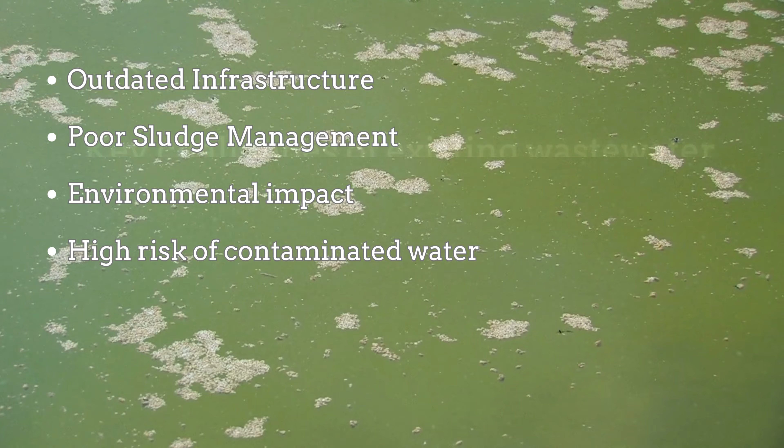The environmental impact is also significant, posing risks to local ecosystems and biodiversity. Most critically, the high risk of water contamination remains a serious concern, threatening both community well-being and water security.

In the heart of Malaysia's rural communities, water is life. It nourishes families, sustains agriculture, and supports livelihoods. But behind these necessities lies a growing crisis.

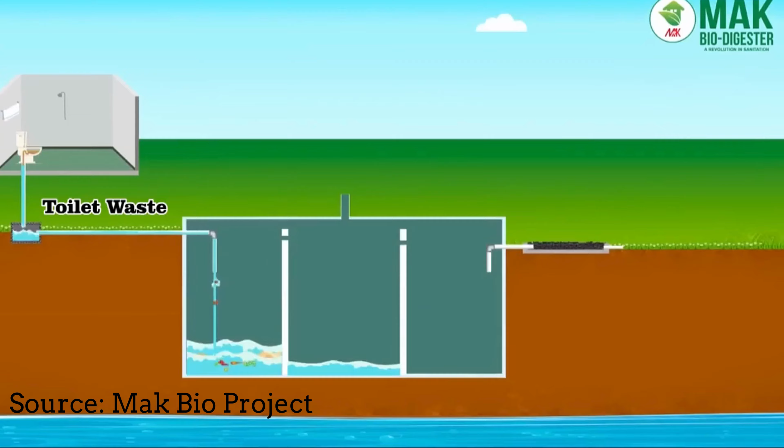Over 7.5 million people in rural Malaysia depend on local water sources. Yet, outdated wastewater treatment systems continue to contaminate these vital waterways.

For many communities, traditional septic tanks are the only solution. But Malaysia's diverse geography poses unique challenges, making this system ineffective.

In Dataran Pantai Timur, heavy monsoon rains lead to frequent flooding, causing septic tanks to overflow and contaminate water sources.

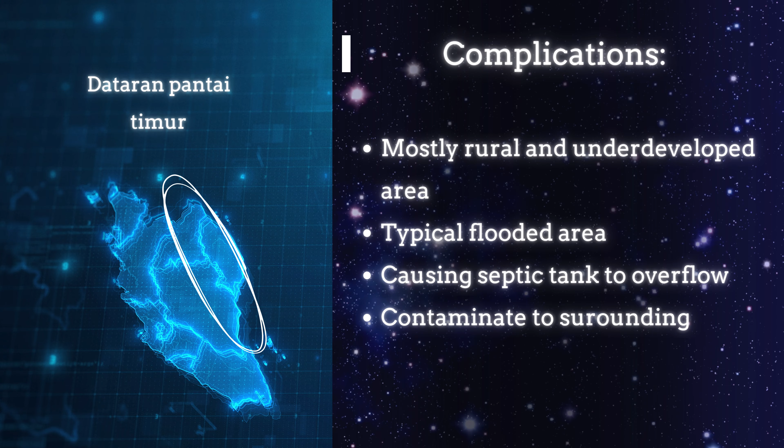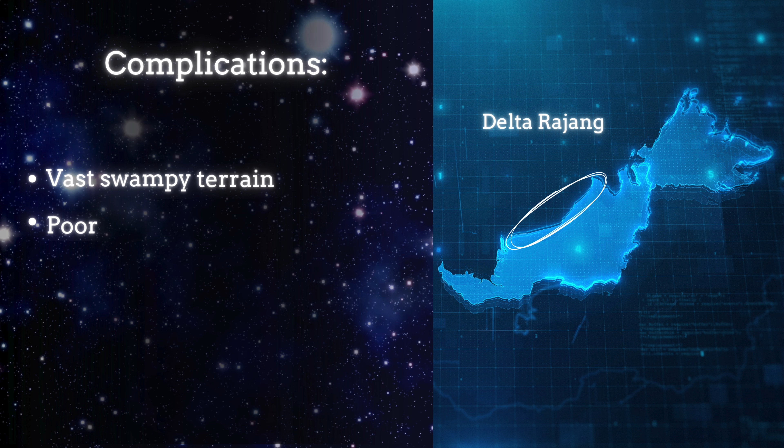In Dataran Johor, high groundwater level and peatlands make wastewater disposal difficult, leading to long-term environmental damage. Meanwhile, Delta Rajang, with its vast swampy terrain, struggles with poor soil drainage, making conventional septic systems ineffective.

To effectively treat wastewater in rural Malaysia, we have designed a multi-stage treatment system that ensures maximum efficiency while remaining cost-effective and sustainable. The process begins with screening, where large debris such as plastic, leaves, and solid waste are removed to prevent clogging in the later stages. For low-density rural areas, we use a manual bar screen, and a mechanical bar screen for high-density areas.

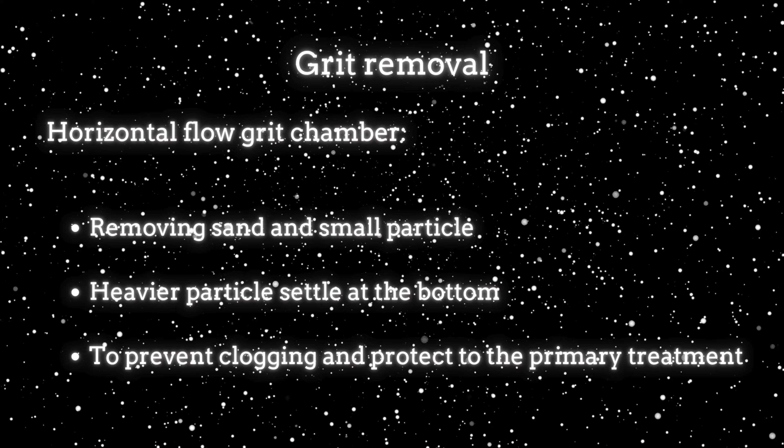After screening, the wastewater enters a horizontal grit chamber. This component is designed to remove heavy particles like sand and small stones that could cause damage to the system. This is to prevent blockage and mechanical wear in the downstream stages.

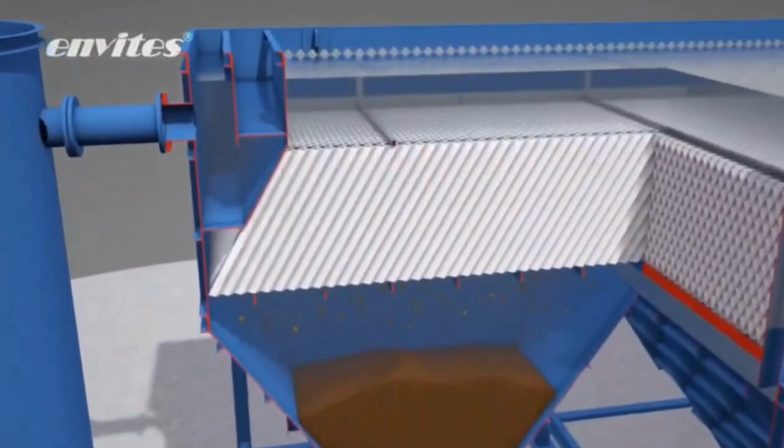Next, the wastewater moves into the lamella clarifier, a sedimentation system that increases the settling surface area without taking up too much space. The inclined plates allow suspended solids to settle faster, reducing sludge build-up and improving the efficiency of our treatment process.

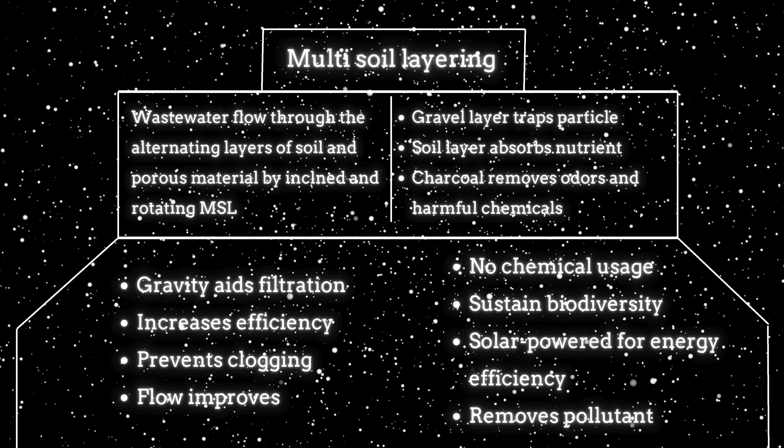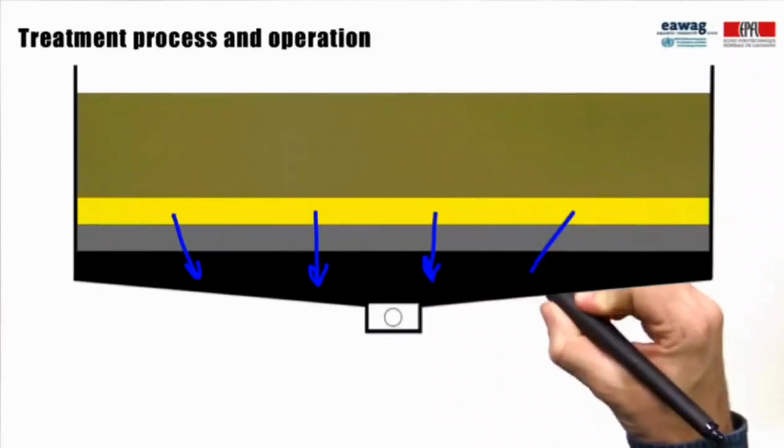To further purify the wastewater, we utilize an innovative inclined and rotating multi-soil layering, allowing better gravitational filtration. Additionally, the slow rotation mechanism prevents clogging and enhances the water distribution. For high-density areas, we integrate a solar-powered system to optimize the energy efficiency, making it sustainable for long-term operation.

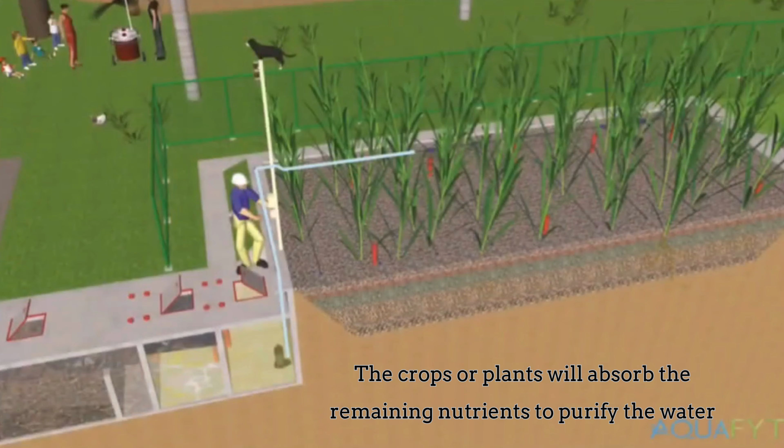In the final stage, the partially treated water enters the constructed wetland, where natural processes such as reeds and cattails absorb remaining nutrients and contaminants, while microbial activity in the wetland further breaks down organic matter. This not only ensures that the water is fully treated before being released, but also restores the ecosystem and promotes biodiversity.

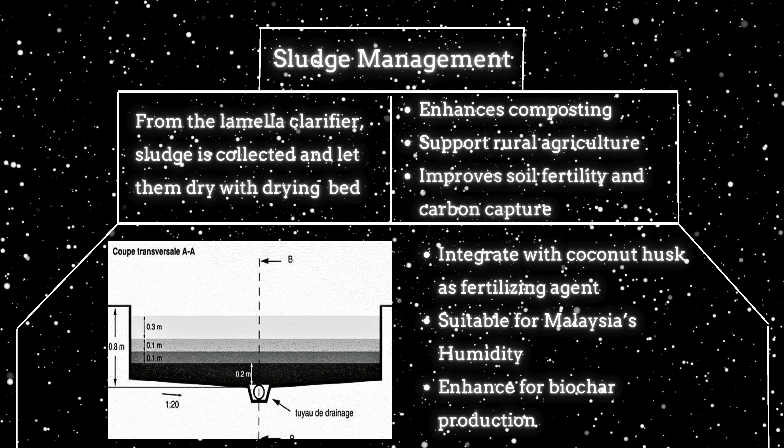For the sludge management, instead of costly mechanical dewatering, we use a sludge drying bed, which is suited for Malaysia's tropical climate and rural setting. Sludge is spread over a sand and gravel filtration bed, and moisture evaporates naturally under the sun.

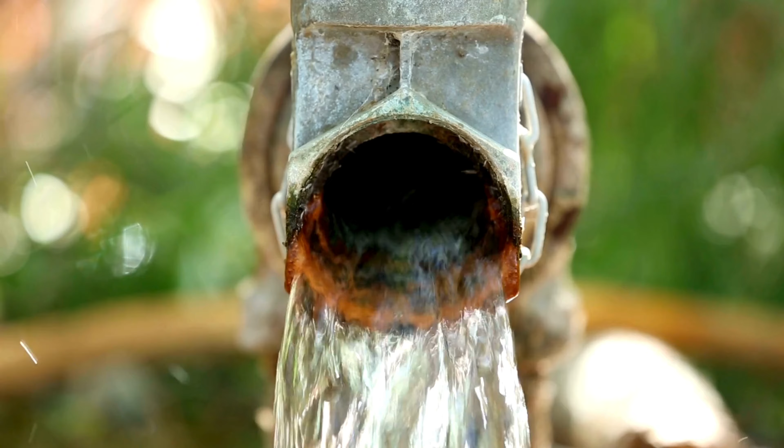To enhance the drying process and create a valuable byproduct, we incorporate coconut husk as it absorbs excess moisture, and process it into organic fertilizer.

Now we will introduce our 3-phase implementation strategy. Our strategy is designed to be realistic, adaptable, and sustainable considering Malaysia's diverse climate and rural population density. For the first phase, we need to validate the effectiveness of our system through carefully selected pilot projects.

This phase primarily involves the following: conduct water quality tests and infrastructure assessment before installation, work with local contractors and universities for installation and monitoring, and train local technicians and community members for maintenance and upkeep.

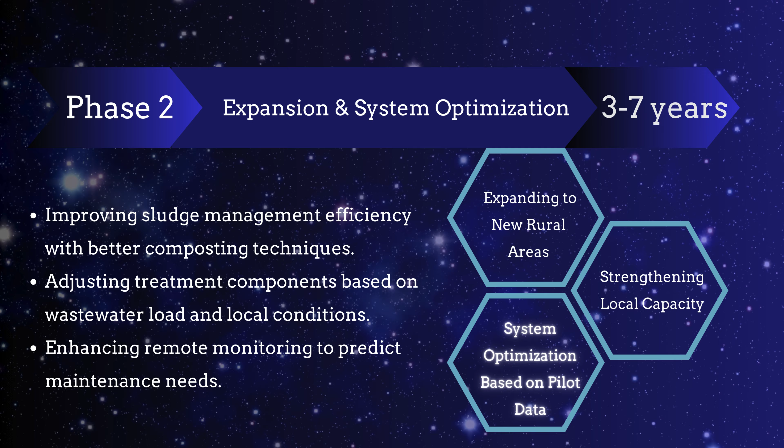For phase 2, after proving the system's effectiveness, we will scale up to additional rural communities while optimizing performance. We will roll out the system in high-density rural villages where sanitation demand is the highest, remote indigenous villages that lack access to centralized sewerage, and agricultural communities where treated sludge can be repurposed as organic fertilizer.

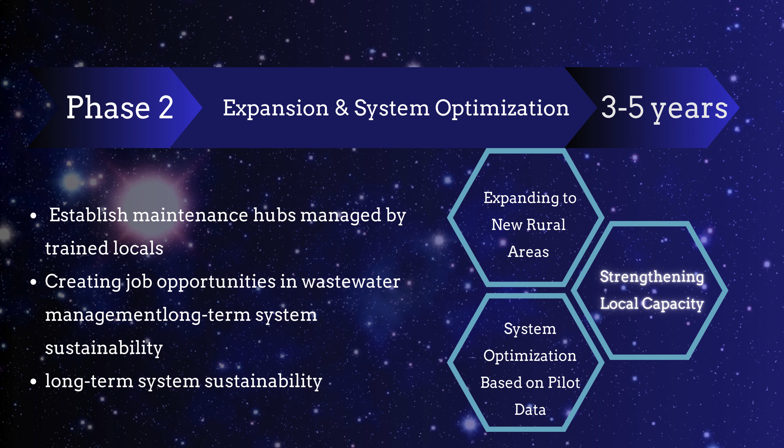Using insight from phase 1, we will refine our design by adjusting treatment components based on wastewater load and local conditions, improving sludge management efficiency with better composting techniques, and enhancing remote monitoring to predict maintenance needs.

We will establish maintenance hubs managed by trained locals, ensuring long-term system sustainability. The training program will be expanded, creating job opportunities in wastewater management.

The final phase aims to establish our system as a nationally recognized wastewater solution for rural Malaysia. To ensure financial sustainability, we will promote a sludge-to-fertilizer business model for rural farmers, introduce microfinancing for community-based wastewater management cooperatives, and encourage private sector investment in rural sanitation projects.

Even after full implementation, our system will evolve through ongoing research collaboration with universities and sustainability experts, regular performance monitoring and technological upgrades, and expansion into other developing regions with similar wastewater challenges.

Through this phased approach, we are not just introducing a wastewater treatment system, we are creating a sustainable, self-sufficient ecosystem for rural sanitation. Our strategy ensures that every aspect, from technology to funding and policy, is covered, making this solution practical, scalable, and impactful for Malaysia's rural communities. By implementing this plan, we can protect water sources, improve sanitation, and uplift rural livelihoods for generations to come.